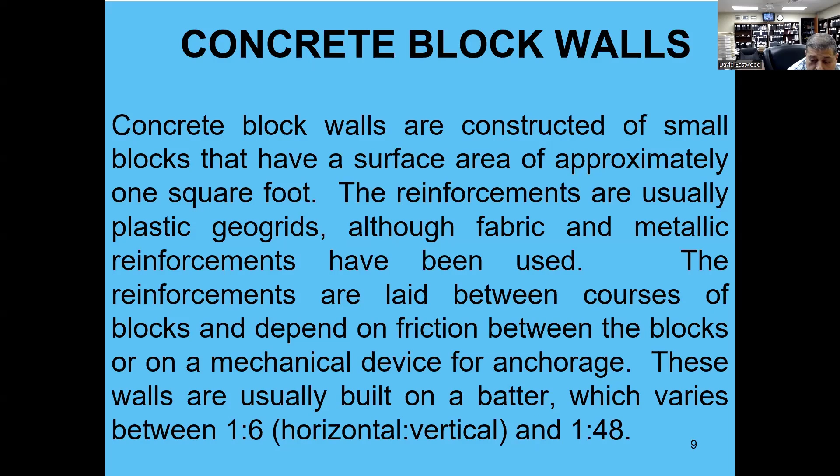These walls are usually built on a batter, typically 1:6 to 1:48. They're great systems, relatively cheap compared to any other kind of retaining wall, and they've been around for a long time.

They use them a lot for detention ponds. The walls for detention ponds are kind of different than regular block wall systems; you have to design them a little bit differently. These are some pictures of the block wall systems used for detention ponds.

This one is near Woodlands, by the way, I always remember that one. There's another one right here. They've got them all over the place now. They're very good, they last a long time, and they're easy to build.

They're economical. The way they're basically set up: you've got the wall units, the drainage chimney here, this is the natural soil, and this is the leveling pad, which can be either lean concrete or gravel. A lot of people just use gravel.

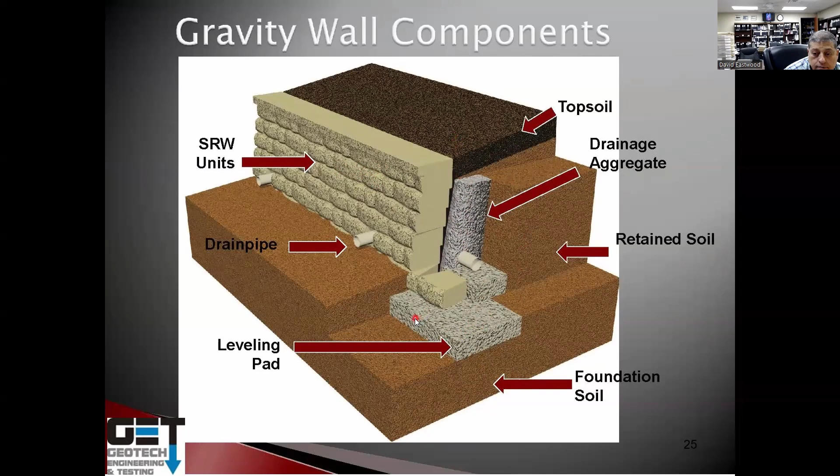Topsoil. The way they make the blocks is they mix sand, gravel, and cement, run them through an oven and dry them, curing them at not very high temperatures, just room temperature type stuff. That's what it looks like.

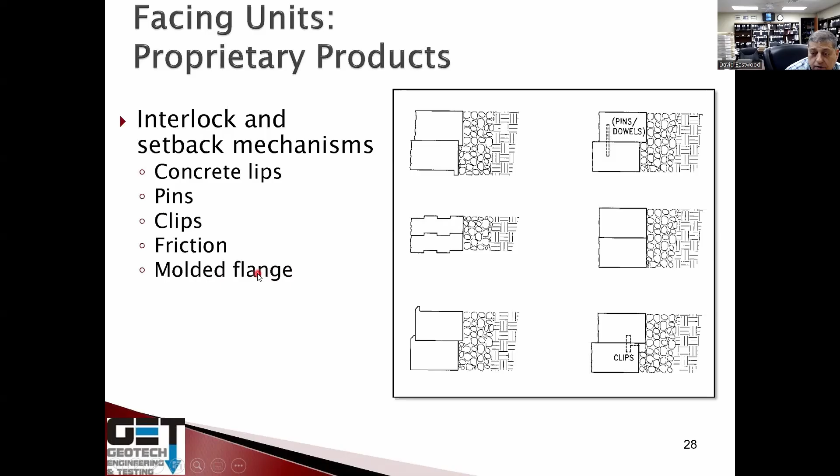The way they work is the facing units are a proprietary interlocking system. Basically they have friction, and they've got lips, pins, clips, friction, molded flanges. That's how they do load transfer to each other, so a lot of times it's friction by itself. The geogrid goes right there in the middle of it, kind of like that.

It's typically a frictional connection, a unique connection between the block and the geogrid. But essentially that's what they are. It's all friction.

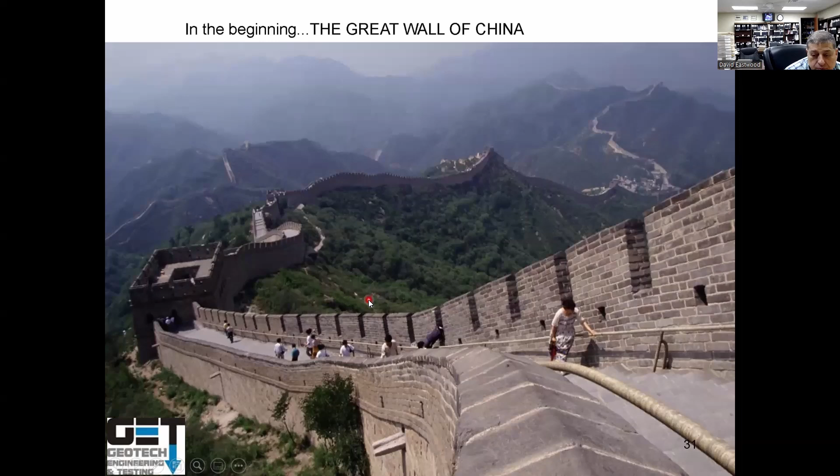They use a lot of geosynthetic soil reinforcement, a geogrid or geotextile. Of course, the geogrid or geotextile is always in tension, so basically it holds the soils behind the block walls in place, and the geogrid is in tension.

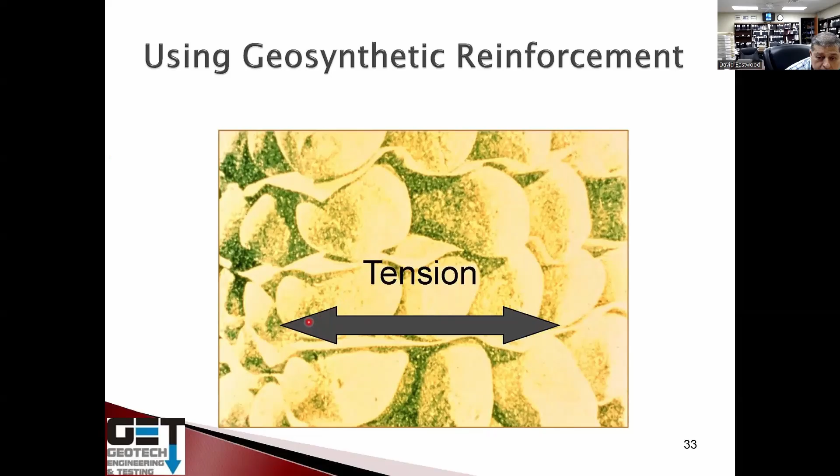For block wall construction, the way you put them in the ground is you put a gravel pad in, make sure you compact it, or you put lean concrete, and you start lining up your block systems, making sure they're level. If you need a drainage layer, you put the pipe behind it, the drainage pipe.

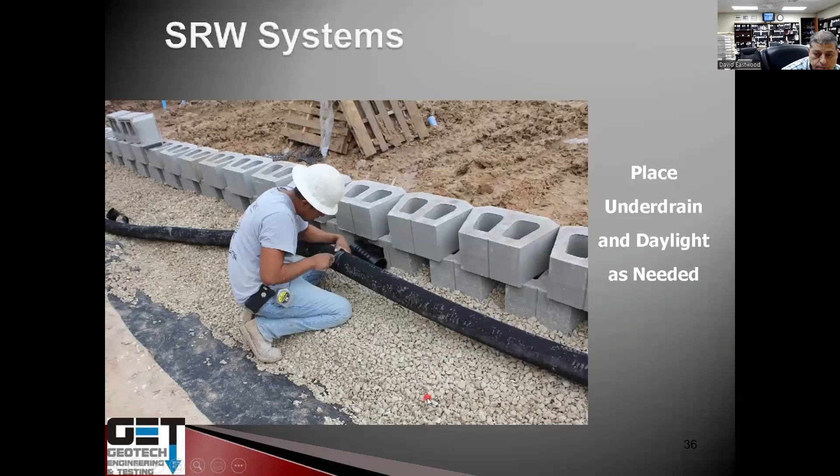So that's how I start putting them, stacking them together in a batter. This is the geogrid itself, and again, it's in tension. It's placed between the block systems, and you have to compact that soil behind it.

I'm going to repeat this many times because that's where I see a lot of failures happening: the backfill they use behind the walls is not good. You cannot use clay, lean clay, or fat clay as backfill behind these walls.

You got to use sand, gravel, things like that, but not clay soils, not silt. Here you go, they're lining them up. Again, you can see that they run gravel through the block walls.

Somebody asked me, why can't you use clay backfill? I'm going to answer that as we go through it, but the clay soil's got low angle of internal friction, so they provide very little friction. So these walls cannot be designed safely with clay soils because of low friction angles. In soils like clay, they've got short-term properties, long-term properties, and rapid drawdown properties.

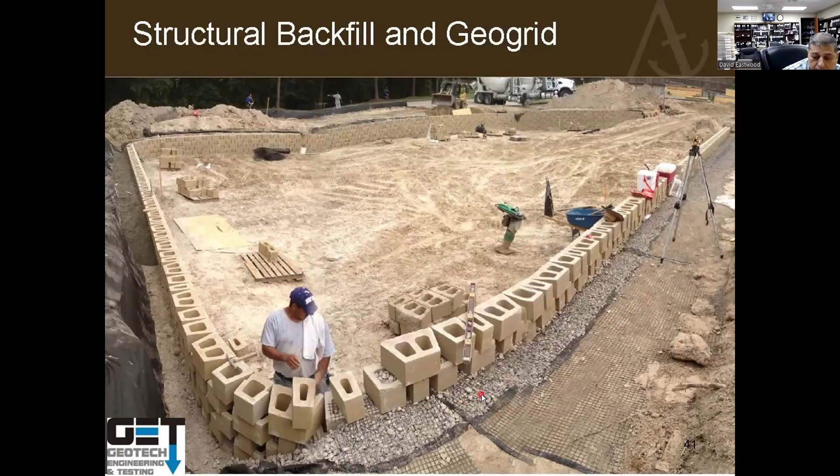Okay, so we got it over here. You can see the fabric in here, you got the gravel pad. Again, you see your blocks filled up with gravel. This is the fabric going behind it.

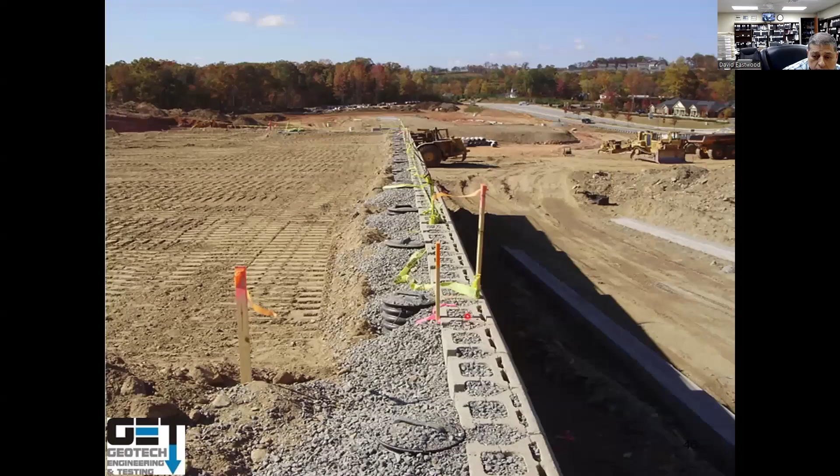You see that? This is the geogrid. Just line them up behind the wall. You can see the system in here, the drainage layer. This is the block wall.

Got a question here: how far is the vertical spacing of the geogrid, and how far back does it have to go to develop tension?

Okay, I'm gonna get to that, man. You guys are ahead of me here. Give me a few minutes when I get to it, and then we're gonna get into it and discuss that.

Anyway, this is the geogrid. Basically you run internal stability analysis on it, and there's software you use, and based on that you determine the type of geogrid and amount of tension they can take. But I'll talk about that in a minute.

Again, you see the geogrid here behind the wall. So when you put these walls in, you got to do an excavation behind it so that you can put the backfill in and the geogrid. So you remove a lot of the on-site material, especially if they're sand, clay, or silt - you're gonna have to take them out.

The block wall, the geogrid, block wall, geogrid, drainage pipe if you need to.

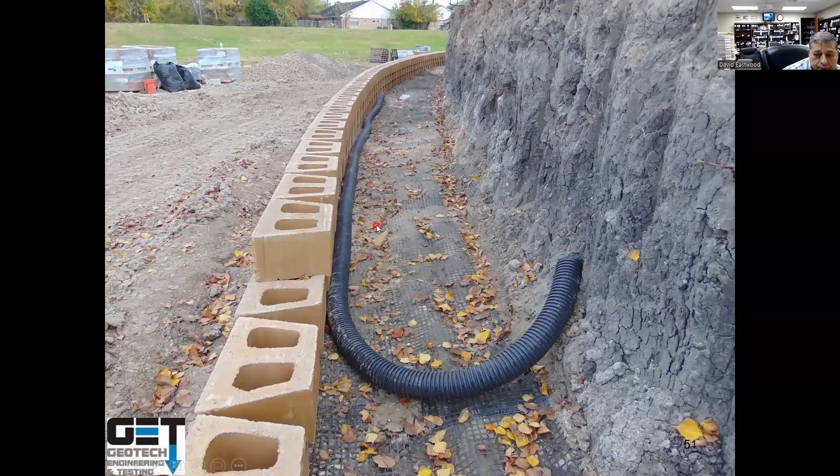You got to be careful how to use it. He's got some stuff in there with respect to soils that's not very accurate. So I'm going to talk about that as I go through this - if you use this design manual, you're going to have to use your soils engineer to help you with it, because some of the parameters they give you here are not accurate.

One thing I don't agree with in the Anchor chart is it says clay and silt phi 26. Okay, that's not accurate. I think for clayey sand, phi of 30 - if you've got not even clayey sand, for sand, phi of 30 is good. Clean sand, phi 34 is good. But I wouldn't be using clayey sand, I wouldn't be using just clay and silt. These parameters are unconservative, given in these charts.

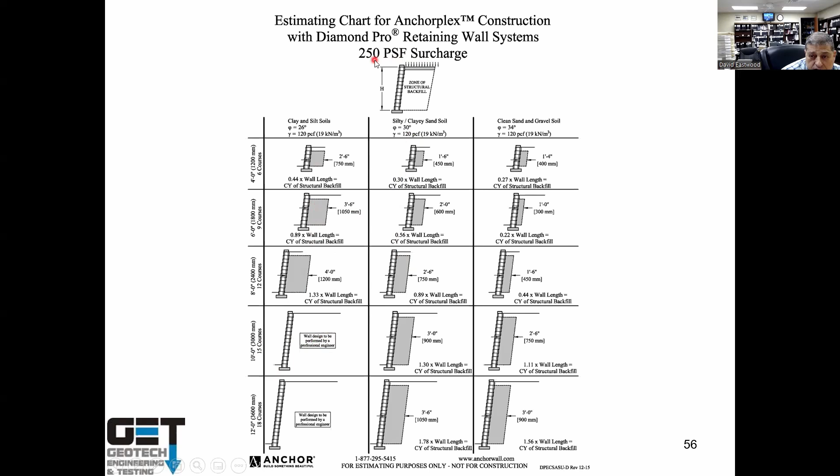Now, if you start going higher, taller walls, you got to put geogrid reinforcement in it, and you got a drainage collection pipe at the bottom in here. This is the natural soils. You excavate behind the wall. You take out all the on-site clay soils or sandy clay soils or silt. You take all that up and put gravel and good sand, SM sand, behind it. I got some gradation for you in the presentation in terms of the backfill.

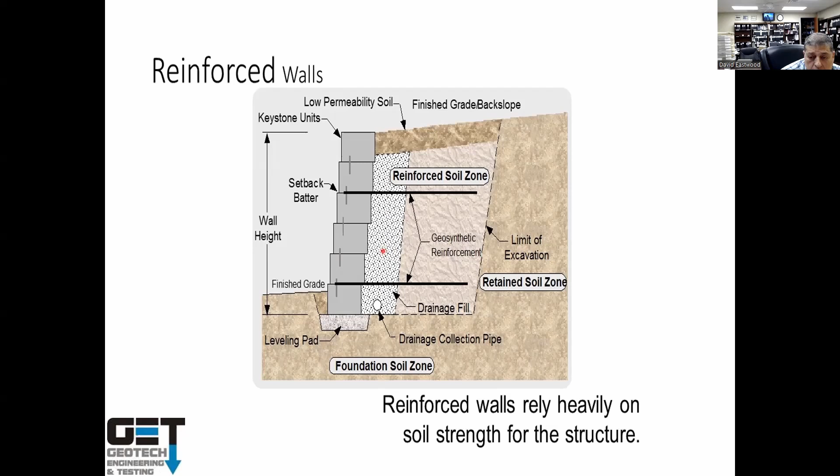When you use these things, phi angle for clays, you use what's called residual soil strength. That's when the soil has already kind of essentially gone through the peak value and is at higher strain levels, soil strength. So let's say you got a typical Houston soil, a PI of 50 - that means your phi angle is 15. The manual's lowest value that they give you in there is 24. So that's where the screw up can come in.

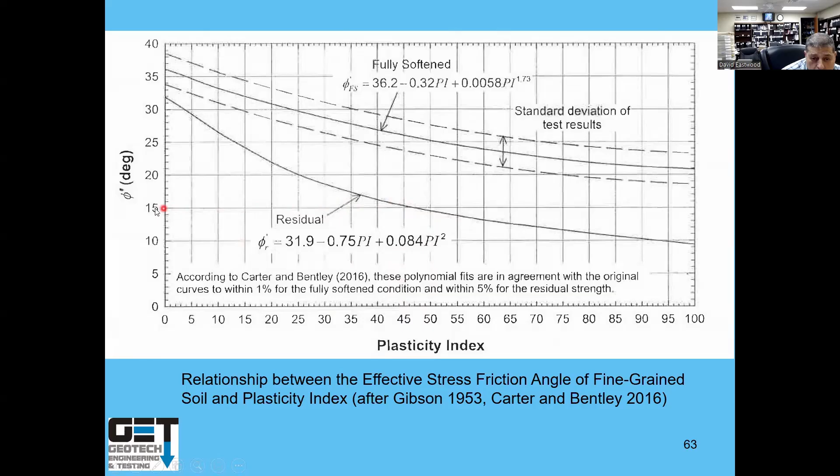So it's very important to use proper soil parameters for these things so that you don't have wall failures. Use residual soil strength when you're coming up with the strength for the wall backfill.

Typical base of it, when you put the block walls on the ground, you put some gravel underneath it. This gravel should have basically a gradation like this: 100% passing number 1 inch, 35 to 75% pass number 4, 10 to 35% pass number 40, and 3 to 10% pass number 200. Base of the gravel should be a minimum of 6 inches, or you can have lean concrete as a base material.

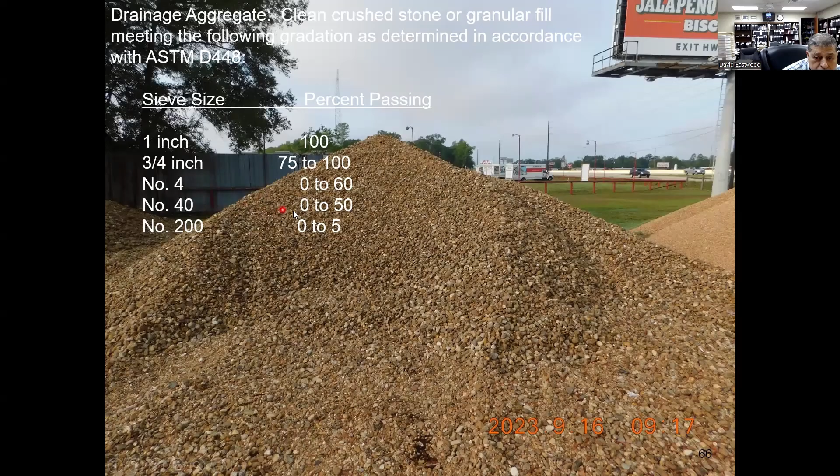Now the backfill, drainage layer, drainage aggregate behind the wall should have basically 100% passing number 1 inch, 75 to 100% pass 3/4 of an inch, 0 to 60 number 4, 0 to 50 number 40, 0 to 5 number 200.

Now reinforcing fill, it says use gravel type material or SM, which is sand. So gradation: 1 inch, 100% passing; number 4, 2 to 100% passing; number 40, 0 to 60% passing; number 200, 0 to 35%.

So you cannot use ML, which is silt, CH, fat clay, OH, organic clays - you cannot use any of that stuff. You cannot use sandy clay or clayey sand. CL, you cannot use lean clay. Make sure you use sand and gravel for backfill.

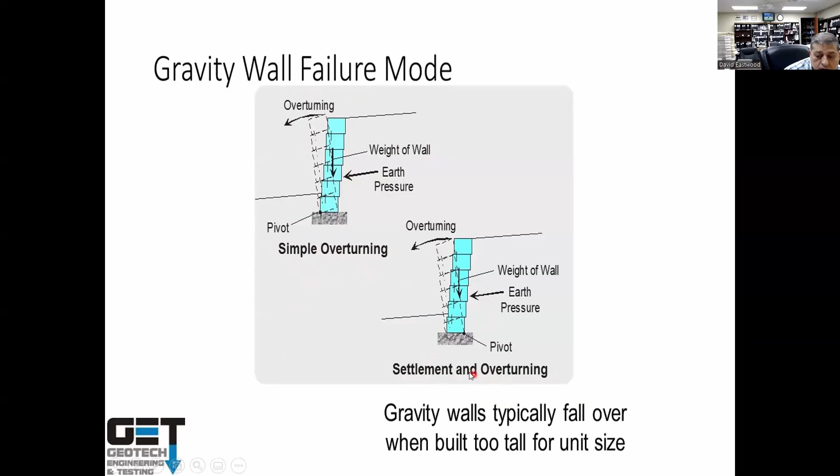You got to design these walls for overturning, bearing capacity, settlement, bearing capacity, global stability - that's a big deal. Structural engineers cannot do global stability, and they don't ask geotechs for global stability. But it should be in the scope of the work for the geotech to do global stability for your wall. And that's not cheap.

So you got to do it right. Overturning, settlement, drainage, and sliding - you got to design for these items in here. When you look at the manual, all they ask for is bearing capacity, essentially. You got to do the global stability, and the structural guy cannot do it. You got to get the geotech to do it.

Advantage of block walls: performance, design flexibility, face drainage. Face drainage is questionable, I'm going to talk about that in a minute. Ease and right of the installation, economics, durability, ecologically friendly.

Performance, dry stack system, tolerate movements. So if it moves a couple of inches, it doesn't hurt anything. SRW units may move and adjust relative to each other - that's good, it can move.

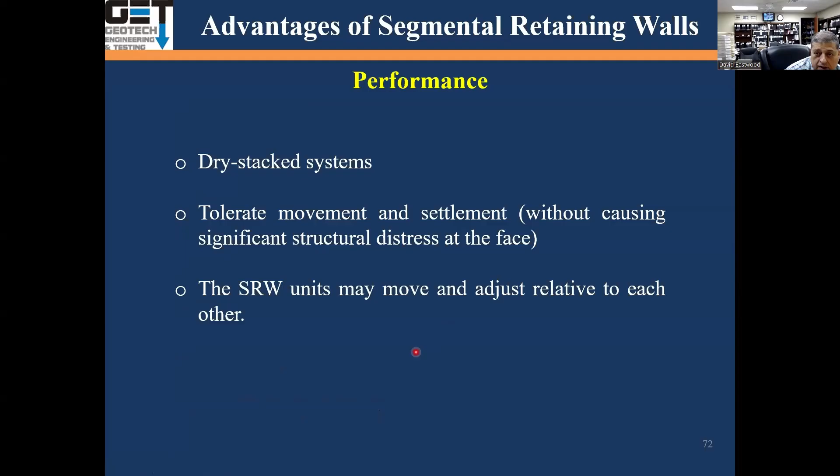Design flexibility: site designer flexibility with respect to retaining wall location, wall layout, height, constructability, typical small size and weight of the SRW units that can be moved by a person.

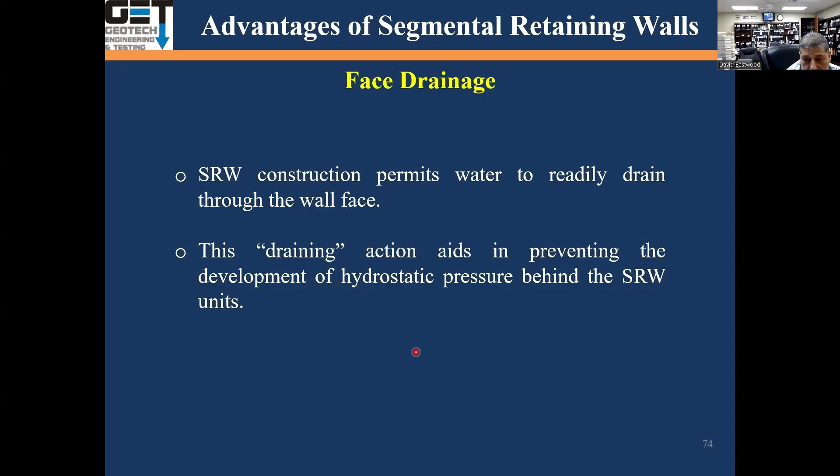Face drainage: theoretically, if you have gravel backfill behind these walls, or good clean sand, they got good drainage. But if you put clay behind it, they got poor drainage. This drainage is supposed to reduce the hydrostatic pressure behind the wall. If you put clay backfill, you could potentially have hydrostatic pressure behind the wall, and the wall is not draining properly.

Ease and rate of installation, they're fast. You can put it together real quick. An experienced crew can put about 300 to 500 square foot of the wall per day.

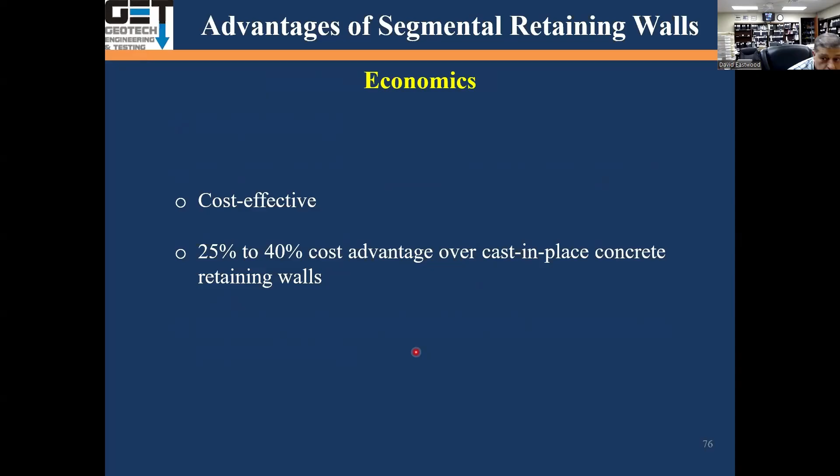Economical, cost 25 to 40% cost advantage over cast in place concrete retaining walls. Durability, they last 75 to 100 years.

This was our project site. This is the building, and they have the detention pond for the property right here. This is located in Montgomery County, Texas, on Highway 105. The wall was 17 foot, and the detention pond was 17 foot deep.

The design was supposed to use Tensar, but they used basically Mirafi instead, which had lower tension capacity.

Okay, I got a question in here.

What are the concerns about building homes on top of the backfill behind the walls? Number one, you cannot build a house on top of the backfill of the block wall system. I wouldn't put a house on top of it in general, because I don't want that foundation system's grade beams penetrating the geogrids. If they cut the geogrid, you can put it just outside of it. When you do that, as part of the design, you got to do global stability, model the house out there behind the wall and run global stability, making sure that surcharge load for a typical 2-story house, about 400 PSF loading, doesn't cause global failure. But the geotech needs to be doing that. A lot of times geotechs have no idea something like that is going on. They don't tell us anything like that.

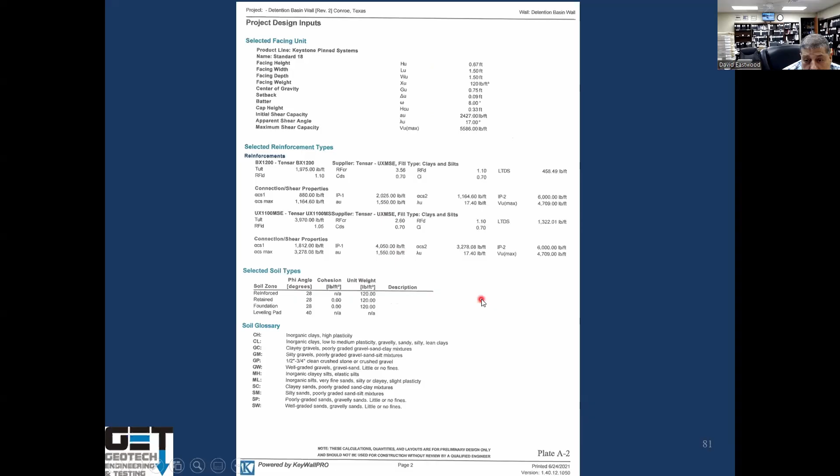Another question: is it okay when the house or building is outside the 1-to-1 ratio, outside the retaining wall heel? Yeah, you can put it there as long as it's not in the backfill of the MSE block wall system. Don't put the house on top of the backfill of the block wall system, and it has to be modeled for global stability by the geotechnical engineer, which most of the time nobody tells them anything about. So it has to be modeled and checked for that. For a 1-story house, you put a pressure behind the wall of roughly about 250 PSF. For a 2-story house, you put 400 PSF.

Another question: would the gravel backing migrate the pond volume out versus clay backfill? Yeah, but these are detention ponds - I really don't care if the water comes out of the detention pond and goes to the surrounding soils. Remember, there's gravel behind it, and behind the gravel is clay, so it stops at that level. Typically it's not a problem if the water is seeping out of the pond, but in general, if you have clay behind the wall, behind the gravel, it's not going to seep out.

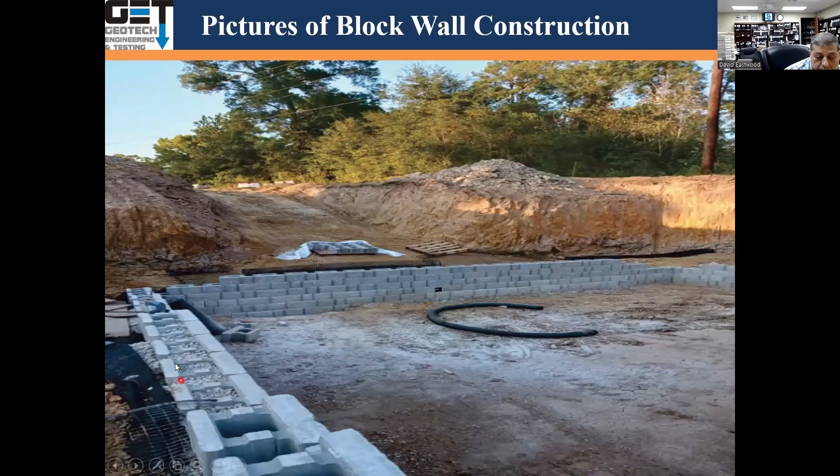Pictures of the wall construction. You can see the block wall system here, with gravel draining behind it inside the blocks. They've got the geogrid going behind it - it's a Mirafi geogrid.

Another question: do reinforcement calculations account for deflection to go around utility and structural conflicts? I'm sure it does - there's good software I'm going to talk about in a minute that you can use. You got to read the manual and see how they account for that. I essentially don't do the structural design for these things, so the manual answers a lot of the questions.

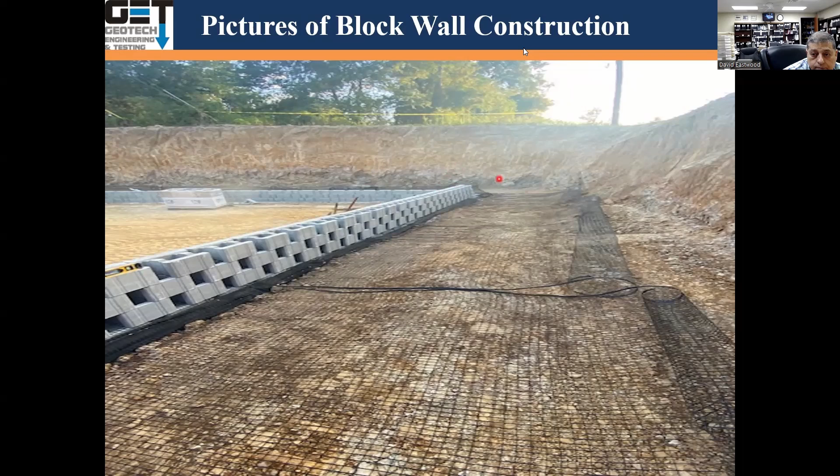So you see the geogrid going behind the wall in here, between the block wall systems. You got gravel behind here, and just right behind the wall. The excavation is 16 foot wide behind the wall, and the geogrid design length was 12 foot. Again, 16-foot excavation, 12-foot geogrid. You can see the geogrid right in here.

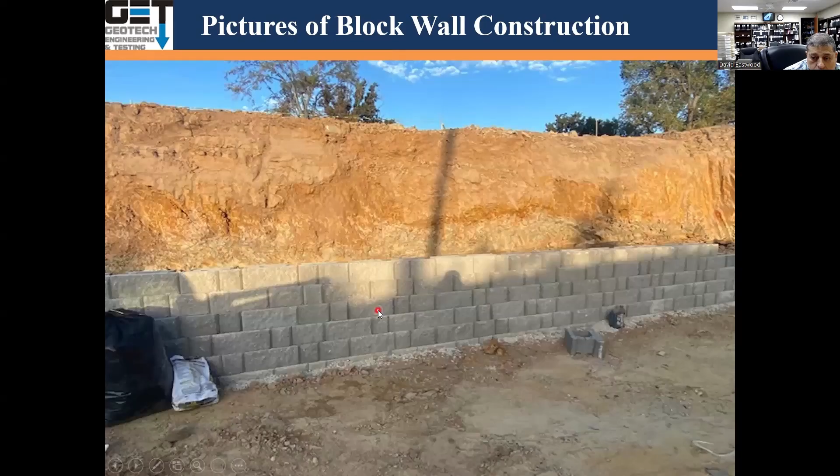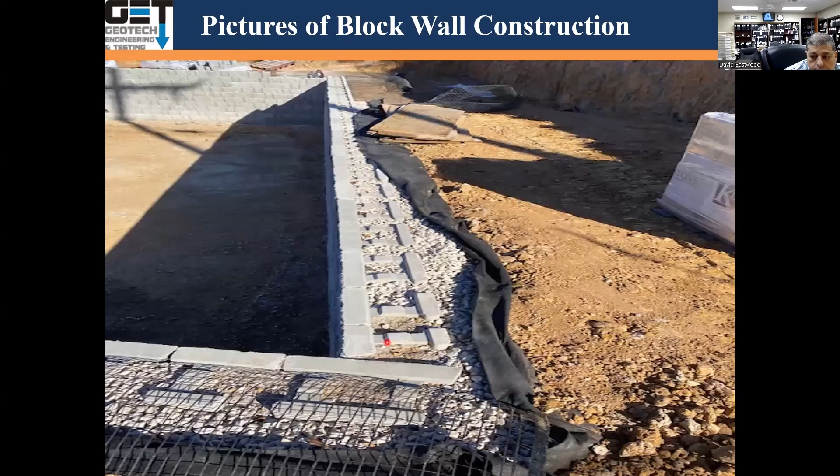I would put the geogrid between all the wall, all the way up to the front. And you can see the wall is coming up. The backfill behind the wall is sandy clay.

They put some wire mesh behind on the bottom of the pond, and they pour concrete - concrete bottom pond. Here's the geogrid. They put pump concrete on the bottom of the pond.

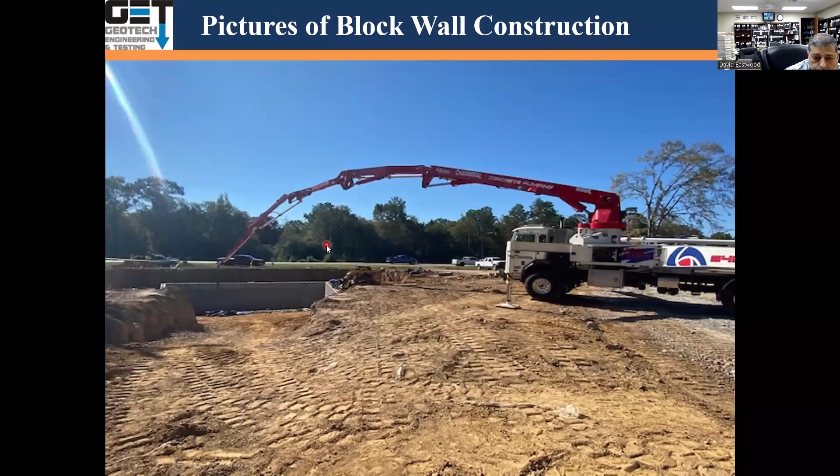Because you don't want the wall to fail. You're gonna have to use proper engineering. So it's a good idea if wall above 4 foot be designed by an engineer experienced in designing block wall systems, if it's a block wall.

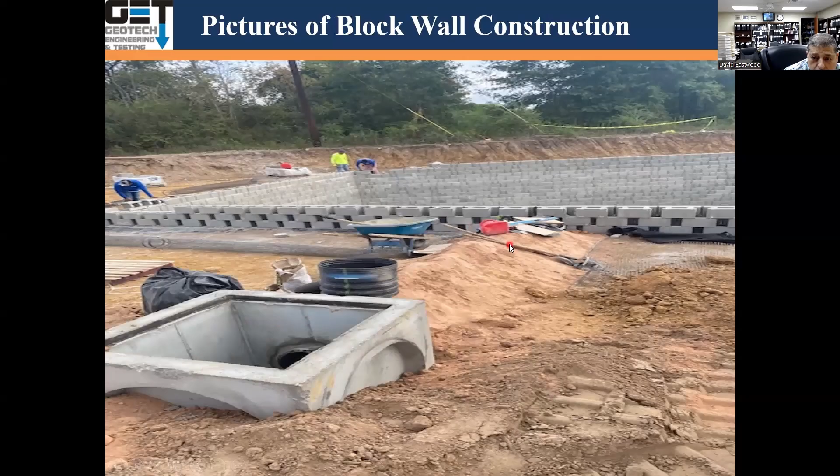Again, you see the geogrid as the wall is coming up. The backfill is sandy clay. It's a completed wall. Detention wall design was 2021.

They used Keystone system. June 28th, site plan drawings, design height of wall was 17 feet. In April, the wall had failed, so we had to go out there and look at it, see what's going on.

Question: is there a recommended maximum slope behind the wall? Typically behind the wall, I like to have slopes at least 3-to-1. If it's steeper than that, you got to run slope stability. If it's gravel, it will stand up, but if it's clay or something, it's going to fail.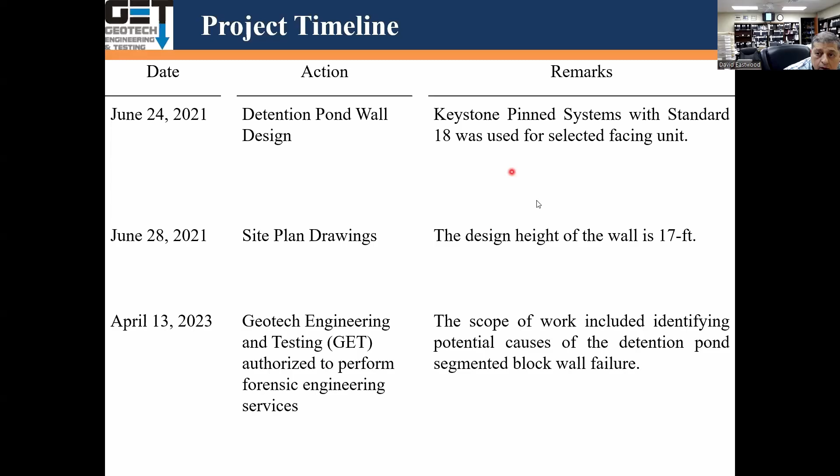Site visits - we went out there to look at the detention pond. These are some observation points we'll look at. If you look at the fence around the pond, it's all busted up and tilted. Lots of erosion around the pond.

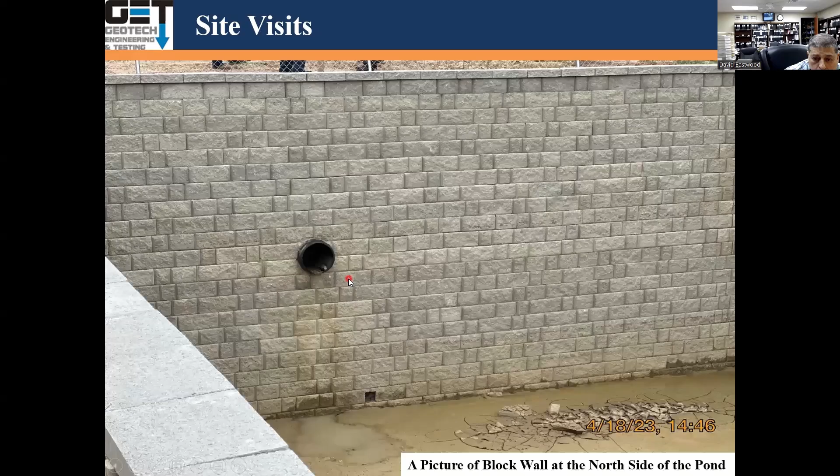The wall failed at the bottom in here. These are where the inlet is coming in. The walls started bowing. More inlet - that's an inlet outside the detention pond.

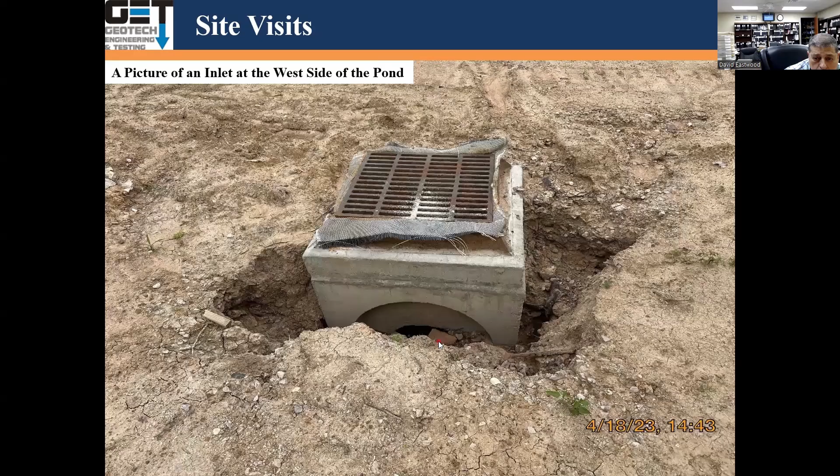Here's the fence. A lot of erosion, got some dispersive soil here. You see the wall bowing in here. Another picture of the bowing of the walls. Failure in the bottom.

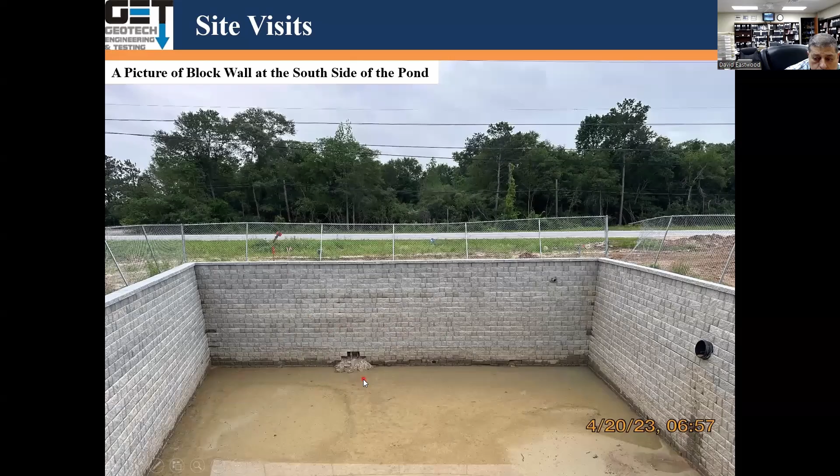So we went out there and did some investigation. We did soil borings and ground penetrating radar, GPR, and we did some test pit excavation to see how it was constructed.

We got a couple questions. What was the slope failure behind the bottom of the retaining wall? Global failure - that's what happened with the bottom behind the wall.

Another question: the retaining wall in San Antonio that failed was called River Mist. That's right, it was a block wall system that failed.

Here's another question: would you ever recommend a stone gravity wall over this staggered block wall geogrid configuration? The parameters would be driving the decision between the two - what alteration is required to your design if the client wants to use expansive on-site backfill? Number one, gravity walls are more expensive than a block wall system with geogrid. A block wall system is a gravity wall too, but it's got geogrid in it - you don't have to use as much mass as a regular gravity wall.

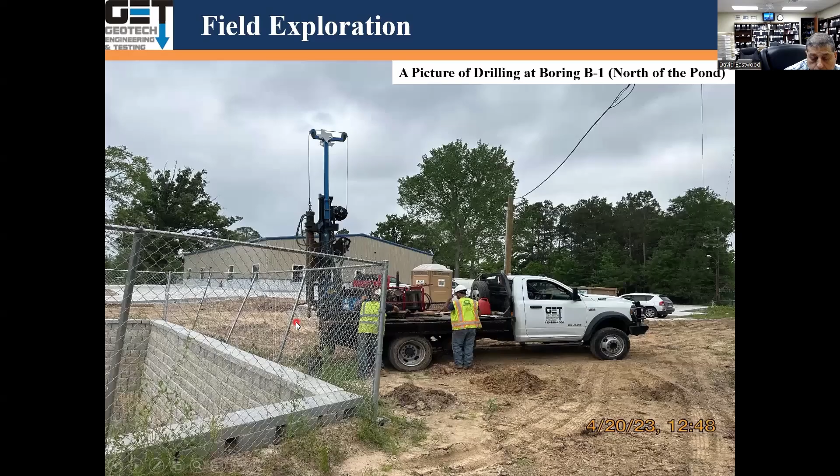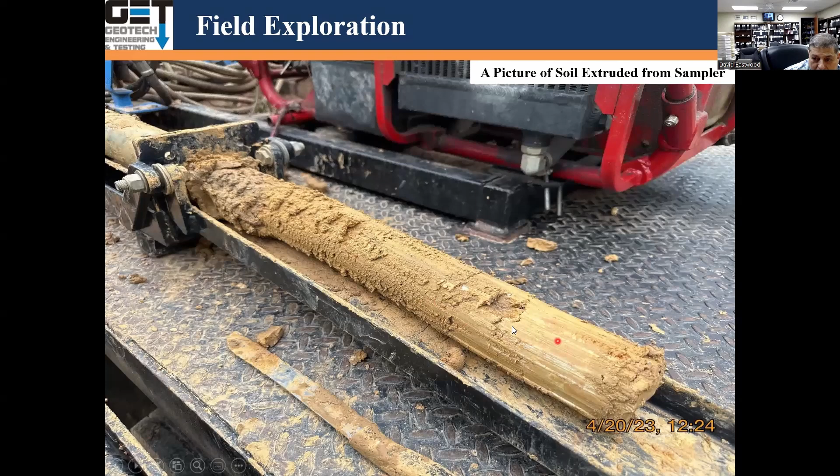So we did 4 borings. This is sandy clay material. You can see the sandy clay material behind the backfill. This was fat clay here, then fat clay and sandy clay. We checked the strength of that backfill with the hand penetrometer.

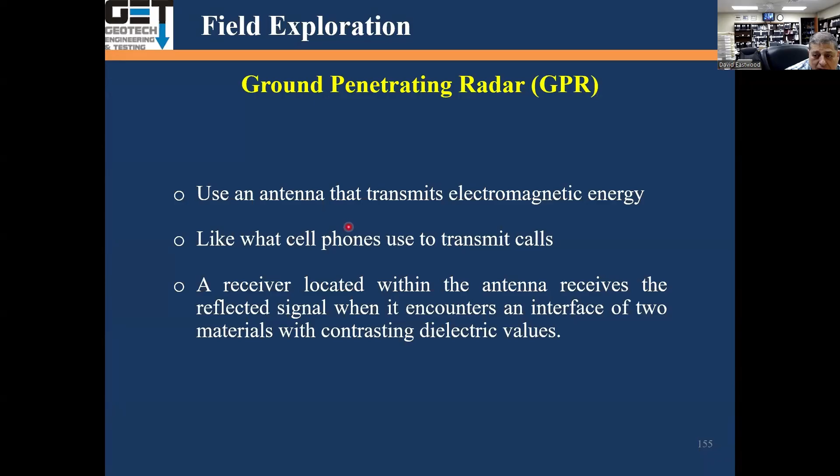We also did GPR. It just uses electromagnetic energy, like a cell phone. That's what it looks like, like a lawnmower. It basically determines areas of high moisture and voids behind the wall. Here's the guy running the GPR at various locations around the pond.

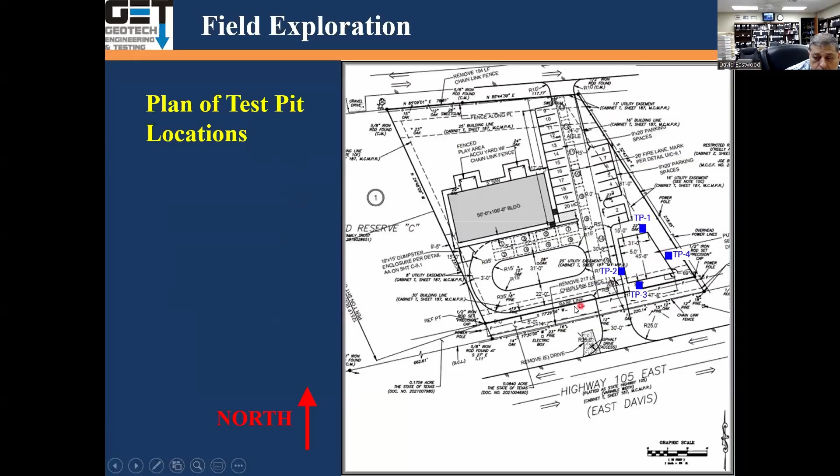We also did test pits, 4 test pits, and each test pit had 2 holes in it. We went all the way to 12 feet away from the wall to make sure the geogrids were there. We measured the distance of 12 feet, with one hole right next to the test pit near the wall and one away from the wall at 12 feet. Two sets of test pits at each location.

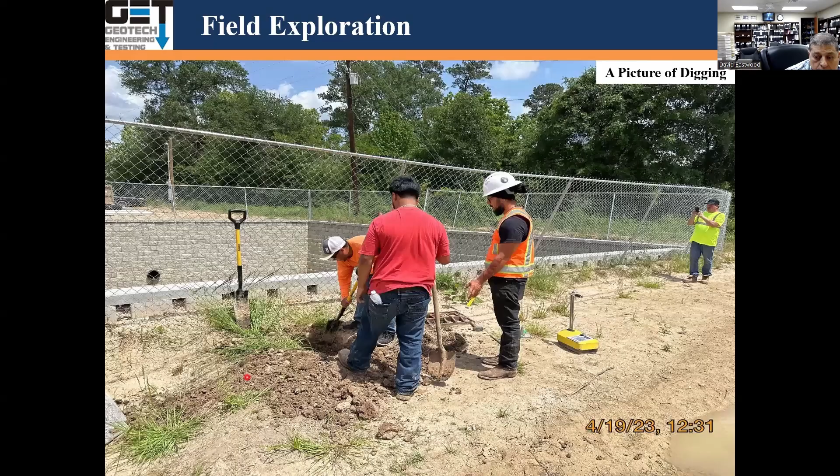This is a test pit next to the wall, and a test pit away from the wall. We found the geogrids in the bottom of the excavations. You can see them - geogrid, geogrid, geogrid.

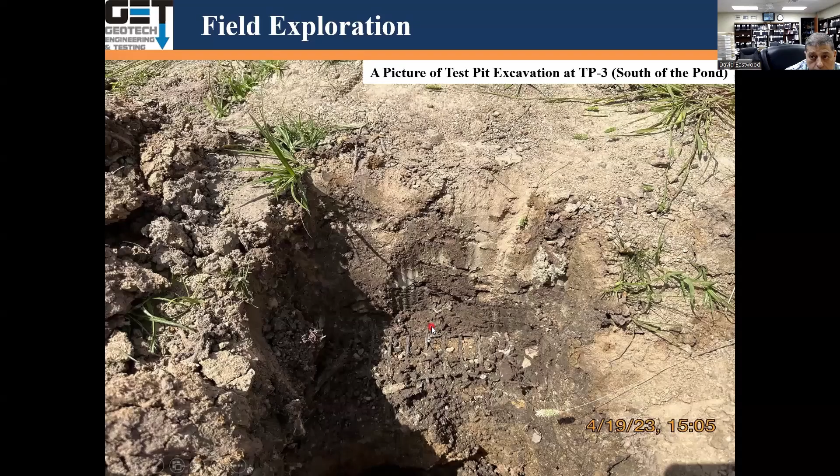Some of the holes got filled with water as we excavated them. It's called a perched water table. More geogrid visible here.

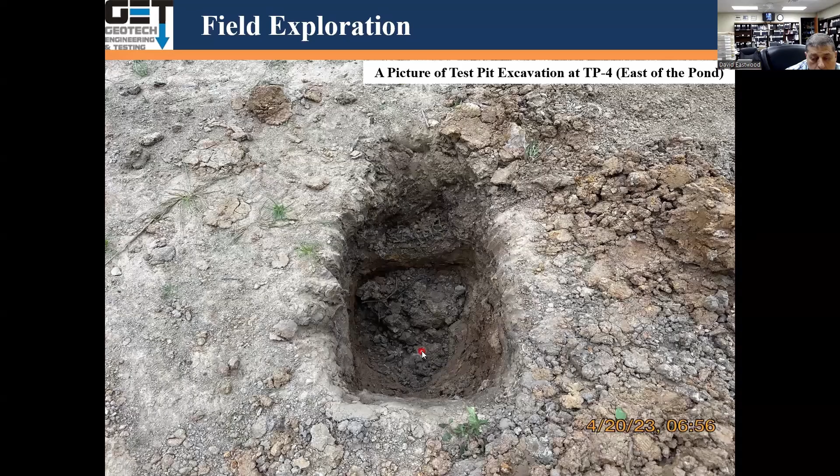So we measured the width and length of each test pit section. We ran a hand penetrometer to see what kind of soil strength we have in the backfill, how strong your backfill is. We measured the dimensions, depths, checked the strengths and sizes.

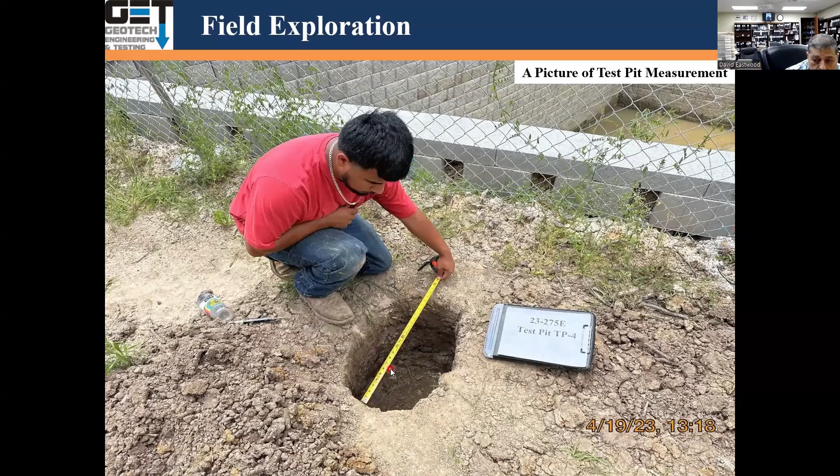Got 2 questions. Somebody says the voice is not good. Can everybody hear me? If not, let me know. I don't know what's going on, but I haven't heard that complaint. Okay, everybody else hears me. Maybe there's a problem with the system.

Question: Is a block wall with a pin system more stable than a block wall with no pins? I don't think so. I think they're both just fine.

Another question. Can hear you just fine. Okay, I can hear you okay. Voice is okay, so most people can hear me fine.

Okay, test pit number 1. If you look at test pit number 1, you have 0 to 16 feet. You've got lean clays, sandy clay. We excavated it - the width was 20 inches, the length was 28 inches, and the depth was 16 inches. The soil was 0.15, very soft soil backfill.

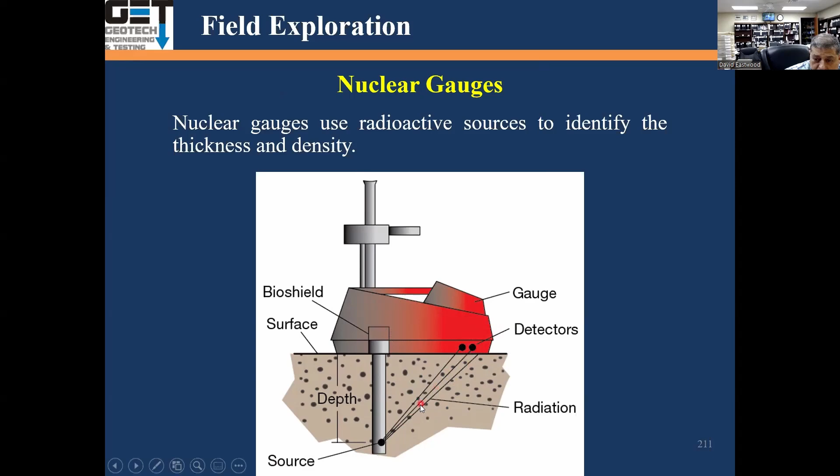We also did the nuclear gauge, which measures density. It's got a nuclear source that emits gamma rays, and receivers. The more of these gamma rays that hit the receiver, the looser your soil is. The less that they hit it, the stronger and more dense your soil is. It's called a nuclear gauge system.

We ran density tests at the top, at 12 inches down, and at 24 inches down, to see what the density of the backfill soil is behind the wall. So we ran a bunch of density tests.

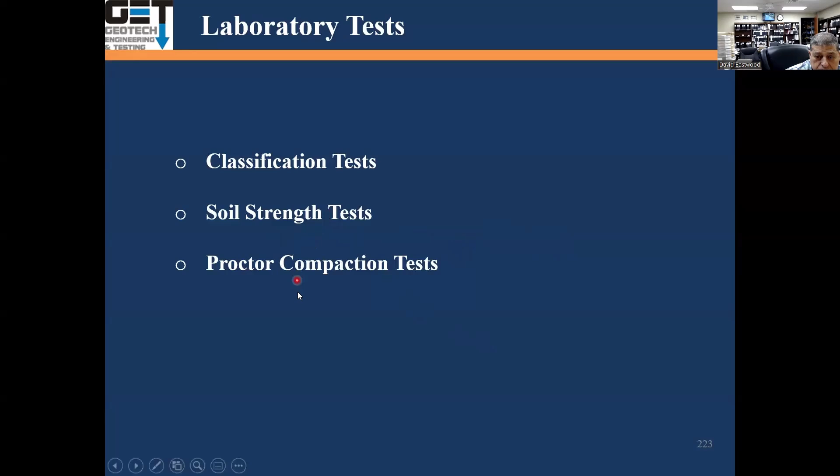Laboratory tests - we got samples of the soils and ran classification tests, strength tests, Proctor tests, moisture content, Atterberg limit tests, hand penetrometer, unconfined compression, and Proctor tests to determine degree of compaction.

We found in borings B1, B2, B3, B4, up to a depth of 16 feet or so, we had sandy clay, and below that fat clay. The sandy clay had a phi of 22 degrees, the fat clay had a phi of 15 degrees.

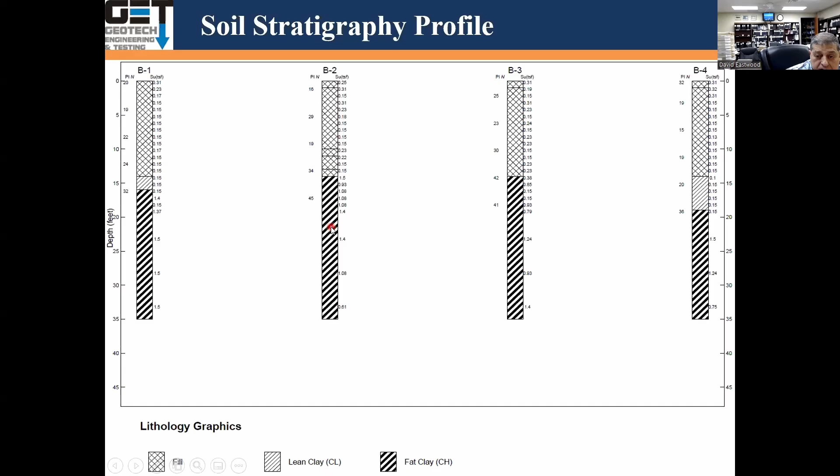So we had 0 to 14 fill, then 14 to 19 lean clay, and in some areas 14 to 35 fat clays. Soil PIs in the lean clay were 15 to 30, and fat clay was 32 to 34, with lean clay around 20 and fat clay 32 to 45.

So they had some bad soils in the backfill. You look at this, the strength values are very low all the way down. We ran the densities - in this case, most of the densities passed. The PIs are 20, 19, 22, 24, 32. That's boring B1.

Boring B2 - low densities, some of the densities failed. Low strength, some densities fail. PI values of 16, 29, 19, 34.

B3, very low strength. Densities fail at the top, but the rest pass. That's B4, low strength all the way down. Densities pass, PIs 32, 19, 15, 19, 20.

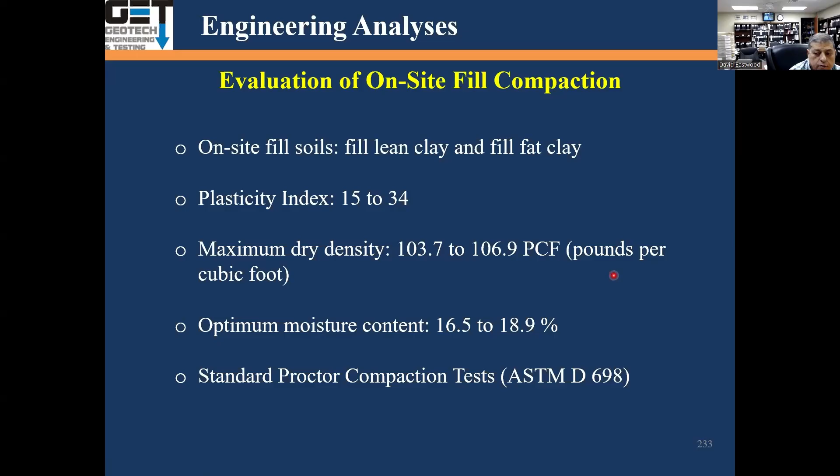Basically sandy clay, we call it lean clay. So on-site fill compaction, the PI of the soils was 15 to 34. Dry densities of 104 to 107. Optimal moisture was 16.5 to 19.

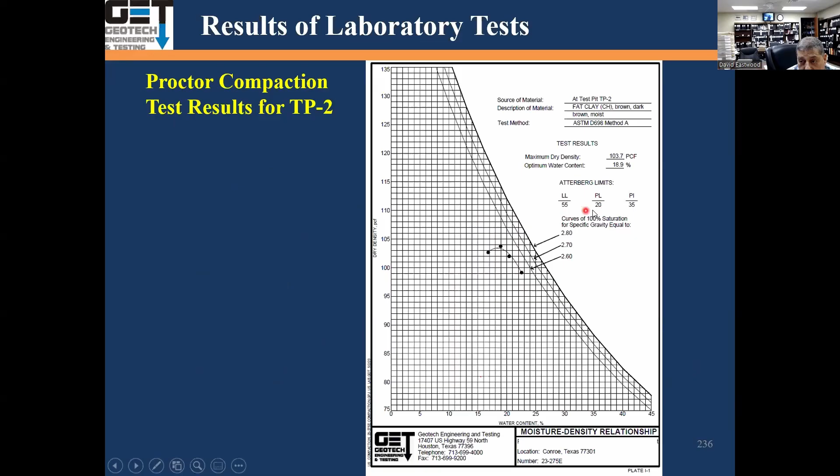Degree of compaction of the soils was 44 to 100%. It should be 95% of standard Proctor density, so it did not pass compaction. These are the Proctor tests we ran - liquid limit 48, plasticity 18, PI of 30. This one's got 55, 20, and 35. This is the summary - test pit 1 densities failed.

Test pit 2 failed. Essentially all of them, these densities with the nuclear gauge, they failed.

Engineering analysis. We looked at aerial photos to see what was out there, and we looked at topographic maps. The pond flooded, so we checked the quality control, checked the compaction, looked for perched water table, checked the soil shear strength, looked at the soil moisture profile, the PVR (potential vertical rise), the GPR results, the bearing capacity of the soils, and the block wall failure analysis and global stability.

This is the site in 1995, a wooded site.

Question: was there QC/QA conducted during the construction for comparison? There was very limited QC/QA done, very limited. That's typical on most projects, most don't have much QC/QA.

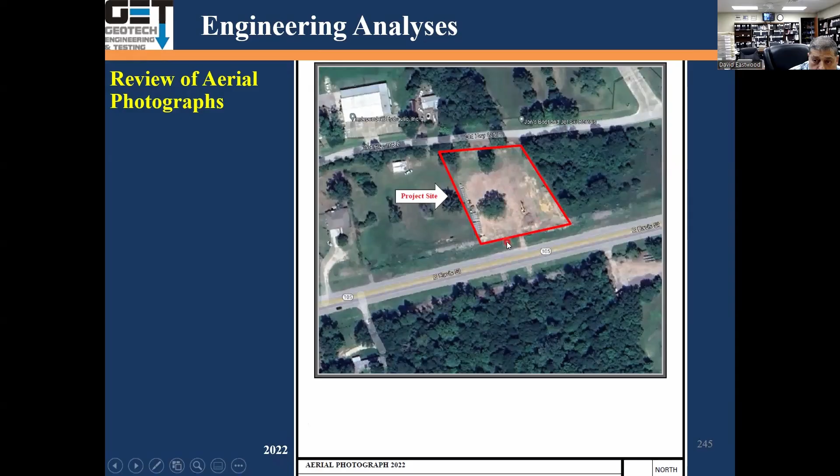You can see that here, a few trees out there on the site. 2006, 2011, 2017, 2022 - you can see the site's cleared and they start digging the detention pond. This is a topo map of the site, relatively flat.

During construction, the detention pond flooded after the construction. That's a big deal for detention ponds. When you have clay backfill and it gets flooded, the clay soils hold the water in the soil itself, so the soil is saturated and has low effective stress. That's where you get a global stability failure. The pond was full of water.

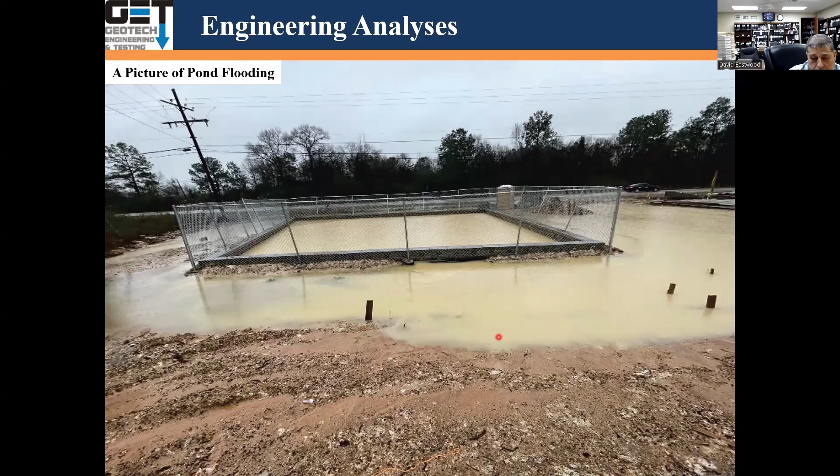The water was removed, but the backfill was still saturated. This is a detention pond that flooded during rainfall. I don't know what kind of detention pond gets flooded - it's not supposed to. You can see the water everywhere.

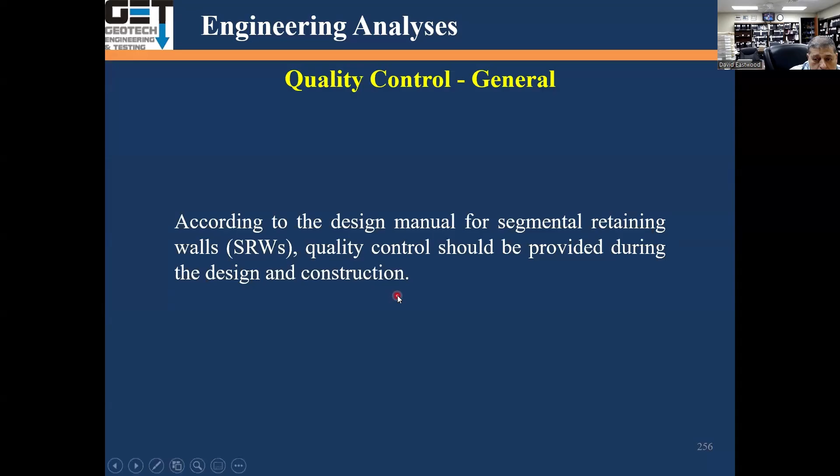Quality control: according to the design manual, there should be quality control during construction. The geotechnical engineer should conduct geotechnical borings, get the soils data, and give all the information for design of the block wall system. If asked, conduct global stability analysis - though we're usually not asked to do that, and the structural guy isn't qualified to do global analysis. We need to define the subsurface conditions, determine strength properties of the retained soils, and evaluate bearing capacity of the soils.

In this case, this was not done. There were no borings done for this detention pond. They just dug a hole and started putting the blocks in.

Quality control, SRW engineer suggested roles: the structural engineer should look at external stability, sliding, overturning, internal stability, facing stability, determination of the maximum unreinforced height, design of the geogrid system, determination of the minimum embedment of the wall, any scour, specifications and approval of the wall units, and determination of what structures can be placed within the reinforced zone of the wall. That's a big deal - if you want to put something within the reinforced zone, it should not penetrate the geogrids, and it should be considered part of the modeling when you do global stability. Again, we don't know these things when we design at the beginning - it's for the geotechs.

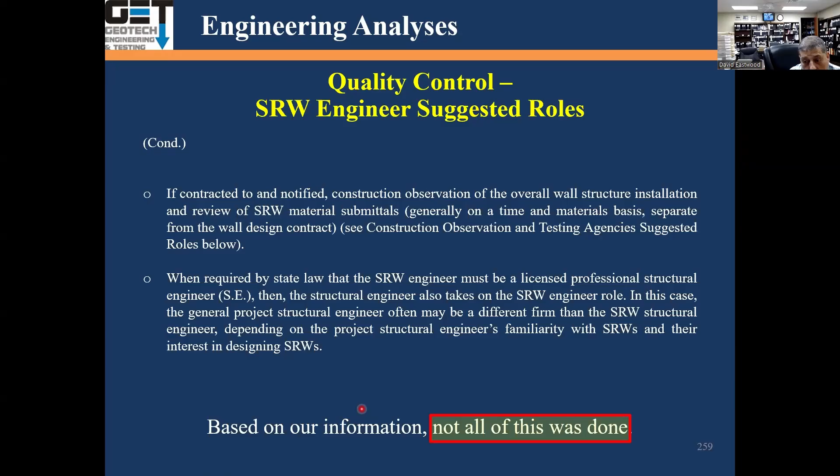During construction observations, on all the earthwork you need to run density tests on all the backfill, check that the backfill is sand and gravel and not fat clays or lean clays, make sure all the geogrids are spread properly and placed behind the blocks, inspect the native soils in the retained zone, and monitor field placement, density testing, and overall material installation and inspection.

Construction observation of wall unit and geogrid installation, review of material submittals if any for conformance with specifications, additional soil properties, and earthwork testing. For this specific project, very minimal quality assurance was done.

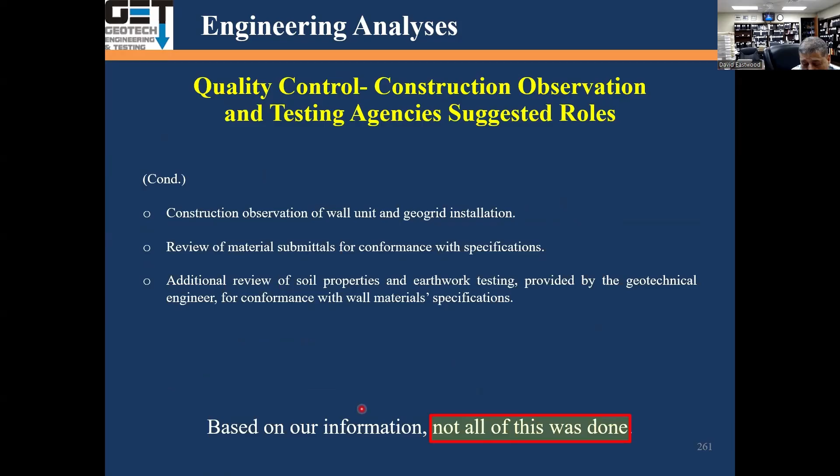Perched water table: some of the holes we excavated behind the wall had water coming in. That means water is trapped in the soil behind the wall, meaning the hydrostatic pressure is not relieved. So you have to assume hydrostatic pressure when you do the wall design.

Shear strength: we ran the soil shear strength on this project, and the lean clay soil backfill had a phi of 22 degrees - very soft soils, but phi of 22 degrees for design purposes. The design manual doesn't have anything less than 24 degrees in it.

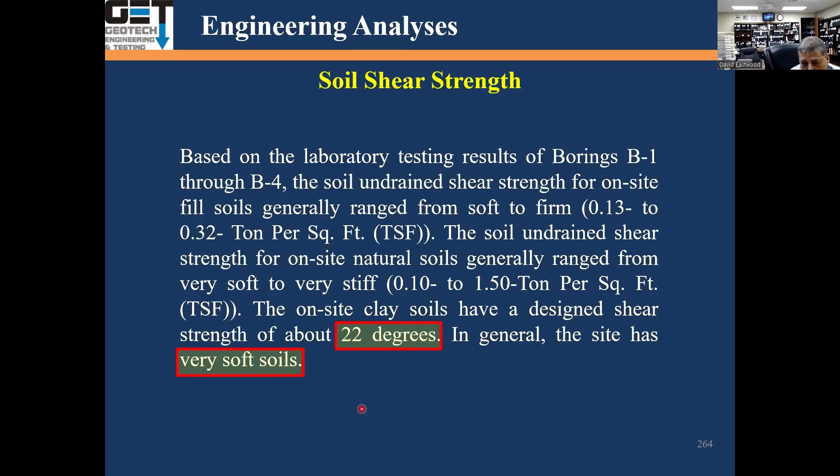The results of the GPR. Okay, somebody's asking a question.

Was there determination of what caused the local bottom block wall failure pop out? Yeah, give me a minute. We'll try to get to causation in a minute.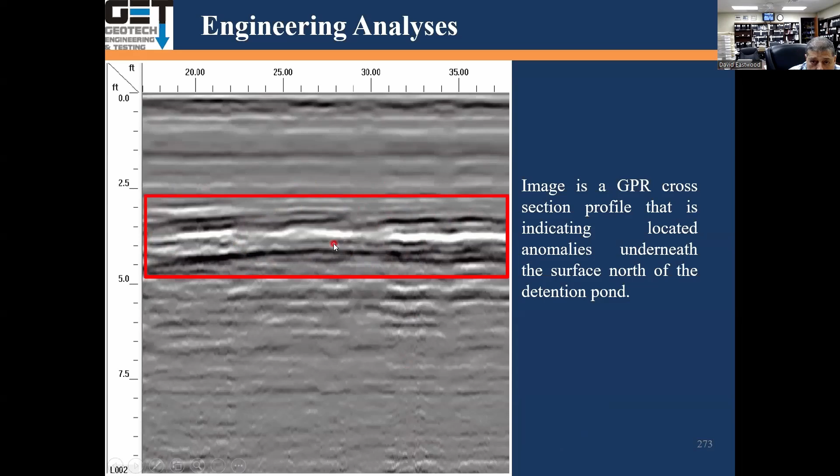That kind of shows an anomaly here with GPR behind the backfill, in the backfill behind the wall.

Bearing capacity, we ran the numbers here. We had a bearing capacity of 1500 PSF.

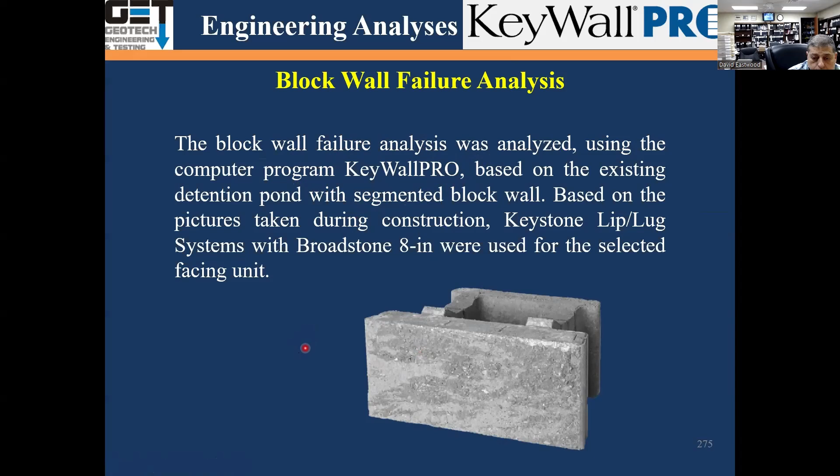Block wall failure analysis was performed. There's a key wall program that the manufacturer provides, and you can design the walls based on that block wall system. Again, GeoGrid Mirafi was used instead of Tensar as backfill, as a GeoGrid behind the walls with lower tensile strength.

The design manual used a friction angle of 24 degrees, that's the lowest it allows. This job had a phi of 22 degrees that the program did not allow for. So there's got to be maybe a modification to the program to allow for a lower phi angle in the modeling.

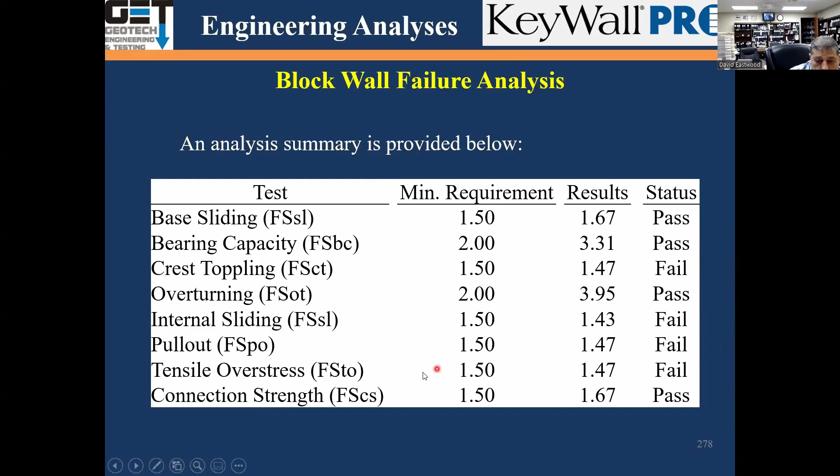When you run the wall program, you will see the base sliding pass, bearing capacity pass, you get factors of safety here. Crest toppling failed, internal sliding failed, pull out failed. So these are some of the tests from the program that show maximum reinforcement separation failed, maximum multiple facing height at the top, RS failed. So that segment of the wall was not properly designed in this case.

L is reinforcement length, which was 12 feet. H is the height of the wall, 15 feet.

Global stability, that's the big deal of what we did. We ran the global stability assuming a rapid drawdown condition where the detention pond got flooded. They pumped the water out of the detention pond, but the soil behind it was still saturated, so there was hydrostatic pressure behind the wall.

So if you use that and use a phi angle of 22 degrees, we analyzed it for short-term, long-term, and rapid drawdown. Short-term parameters represent end of construction. Rapid drawdown represents water level change condition. Long-term conditions are applicable to soil gravity loads and continuously applied live loads.

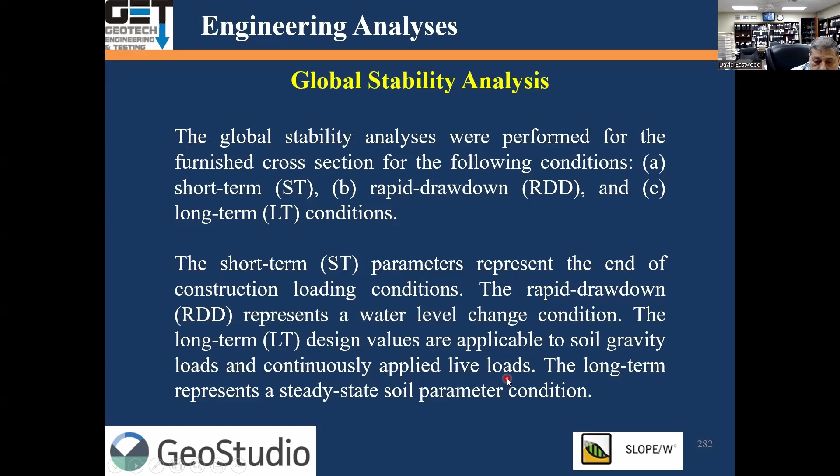Steady state conditions, global stability, short-term was fine. We ran the short-term, there was no problem with it. The soil parameters we used: 0 to 20 feet, we had lean clay with a phi of 22 degrees. Below 20 feet, we had fat clay with a phi of 15 degrees.

All this should be modeled. The structural engineer is not going to do this. You should get the geotechnical engineer to run the global stability.

These are the modeling of the stability. We had the lean clay backfill, this is the pond, this is the fat clay. Here's the slope failure. Factor of safety of 1.4.

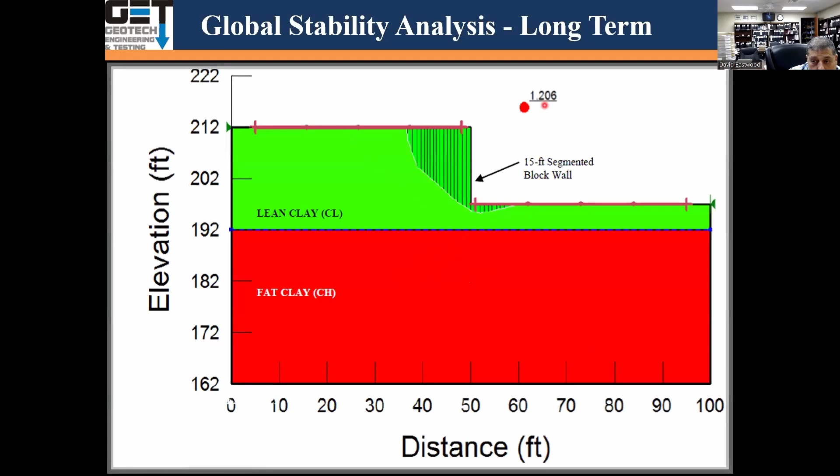Global stability for rapid drawdown, 0.5, not acceptable. For long-term, factor of safety of 1.2.

So short-term was 1.4, allowable was 1.3 factor of safety. Rapid drawdown 0.55, acceptable factor of safety is 1.25. Long-term 1.2, and the required factor of safety is 1.5. So the wall was essentially unsafe.

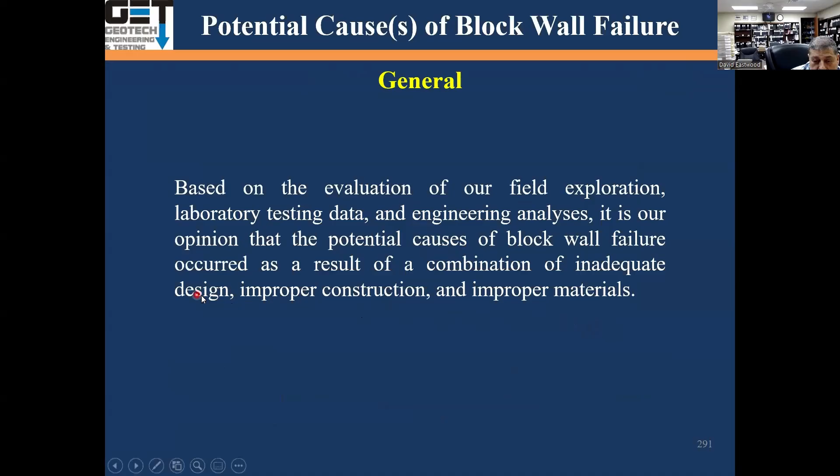So based on the evaluation of the field and laboratory exploration and laboratory testing, basically the wall failed as a combination of inadequate design, improper construction, and improper backfill materials.

Inadequate design: no soil investigation was done to design this wall. National Concrete Masonry Association indicates the soil parameters for the wall should be provided by the geotechnical engineer. There was no geotech. A phi angle of 28 degrees was used in the design, it should have been 22 degrees, and for the soils below 20 feet, it should have been 15 degrees.

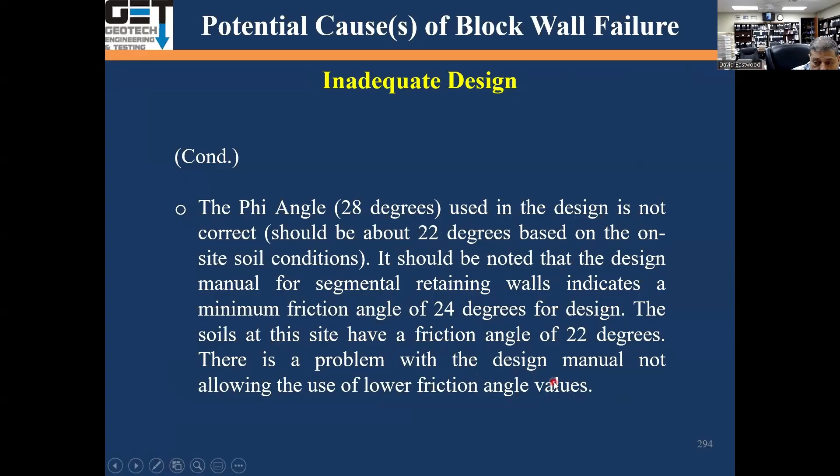The results of the global stability analysis show that the wall is not stable. No specific drainage system was designed behind the wall.

Construction, based on the field review of the pictures during construction, did not meet the design. They didn't follow the design recommendations for construction. The degree of compaction behind the wall was not 95%. And the GPR showed the presence of voids and high moisture. There was hardly any quality control done with the backfill behind the walls.

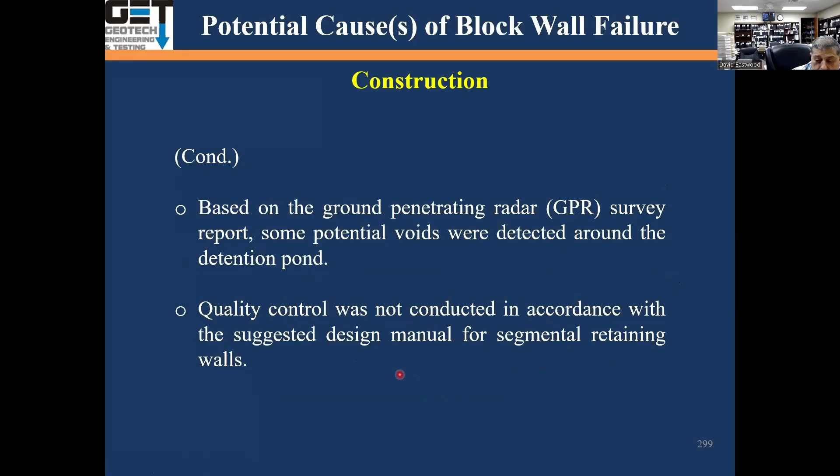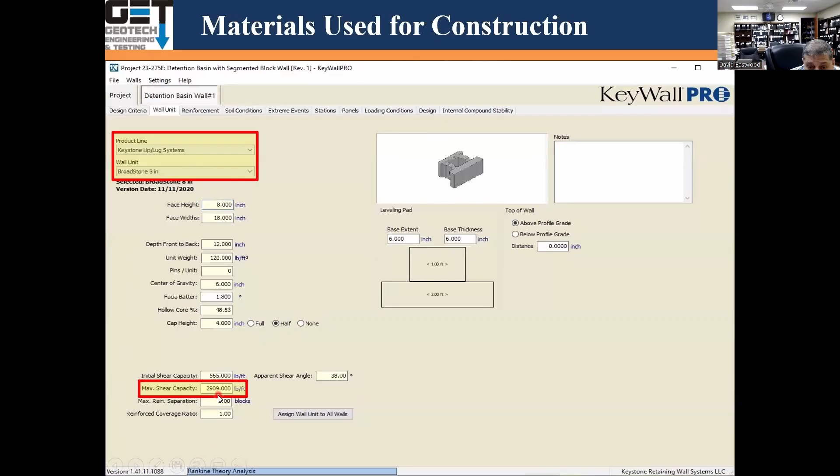In the design, they used 2909 as the maximum shear capacity. The maximum shear reinforcement geogrid they used was Mirafi. The tensile was 2781, but the design called for 4709. So they changed that, using 2781 instead of the required 4709 for tensile strength.

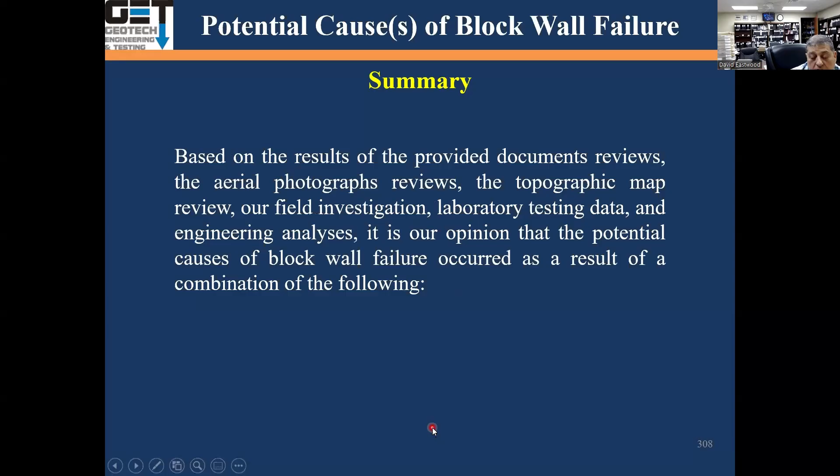Summary. Based on the documents reviewed, the failure occurred as a result of: no soil investigation done, improper soil parameters used for design, no block wall drainage provided, construction built not as per the design, field soils not properly compacted, presence of voids around the detention pond, detailed quality control not done, low shear strength block wall system, and low shear reinforcement. These were material and construction defects.

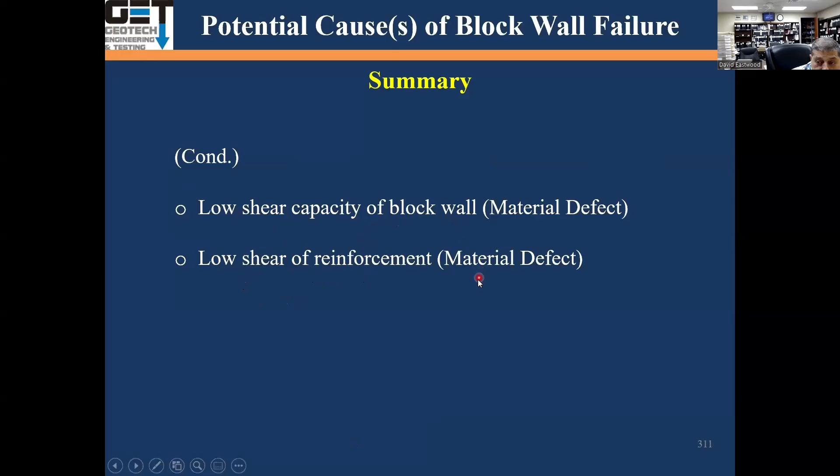We recommended the existing detention pond be removed and replaced with a whole new one. So that's what they did. They tore it down and built a new one, and they designed it right this time.

So that's the end of the presentation.

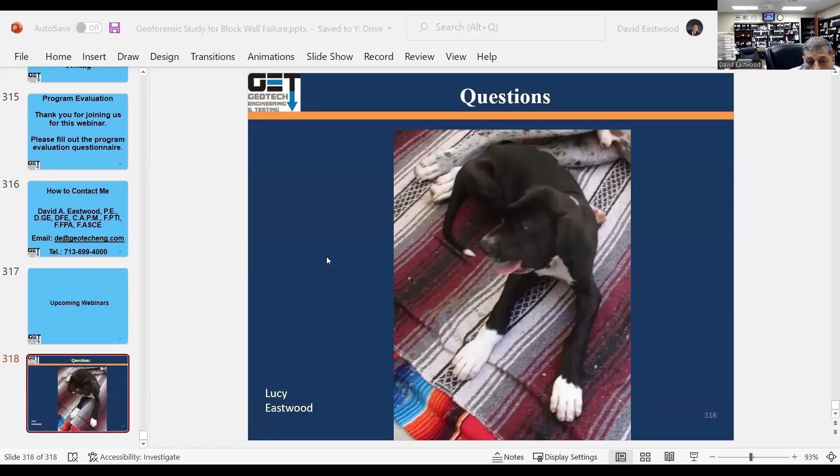Let's go to the question again. Very informative, thanks, good, and here we go.

Question: were there options considered in mitigation remediation rather than complete replacement? No, we did not look at any other mitigation. It would cost too much money and take too much time. We just felt like it was better to just tear it down and build a new one.

Ron Bavarian: thanks, David, good information. Well, I'm glad you like it. Thank you. Great info.

In your opinion, was the material or construction the major factor in the failure? I think it was about 30% design, 30% construction, and 30% wrong materials. Essentially, if you want to go about it, it's probably 30% design, 70% construction.

Is there a drain pipe needed if gravel is used? I don't know off the top of my head. I would say yes. We wanted to get that water away from behind the wall, so the only way to get it out would be with a drain pipe.